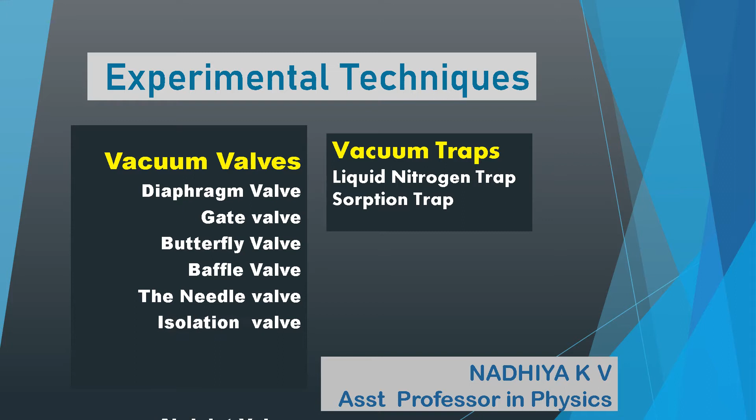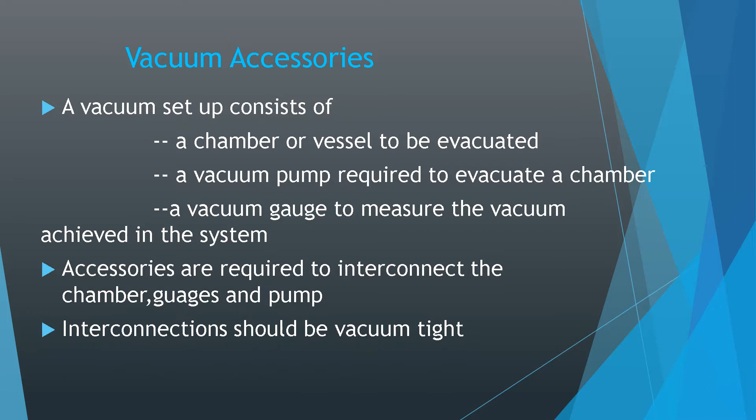Today we can discuss the topic which is the last topic of this module, that is vacuum accessories. A vacuum setup consists of a chamber or vessel to be evacuated, a vacuum pump required to evacuate the chamber, a vacuum gauge to measure the vacuum achieved in the system, and vacuum accessories required to interconnect the chamber, gauges and the pump, and the interconnection should be vacuum tight.

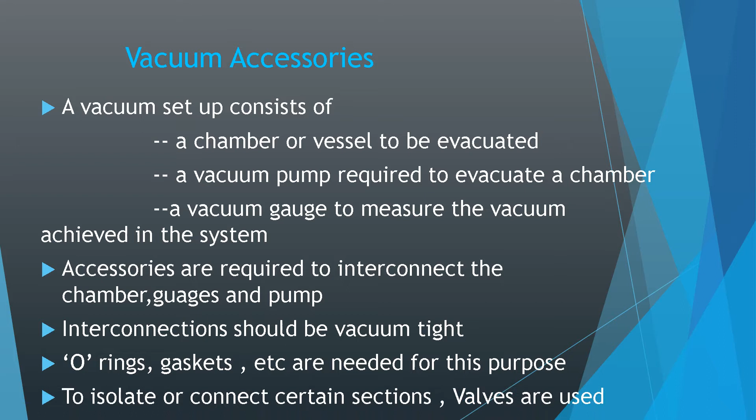O-rings, gaskets, etc. are needed for this purpose. To isolate or to connect certain sections, valves are used, that is vacuum valves. We had to discuss the following valves together today.

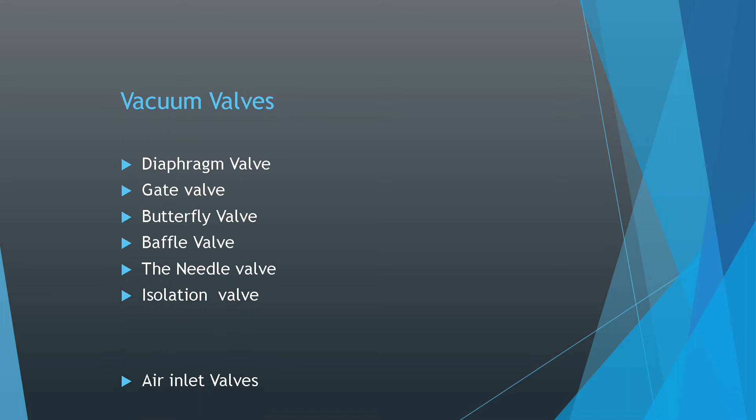The first one we are going to discuss is the diaphragm valve. It is the simplest and frequently used valve. A diaphragm is made of a polymer material and is clamped at its edge, and the stem is attached to the center. The diaphragm, when pushed against the valve body B below, isolates the input and output ports.

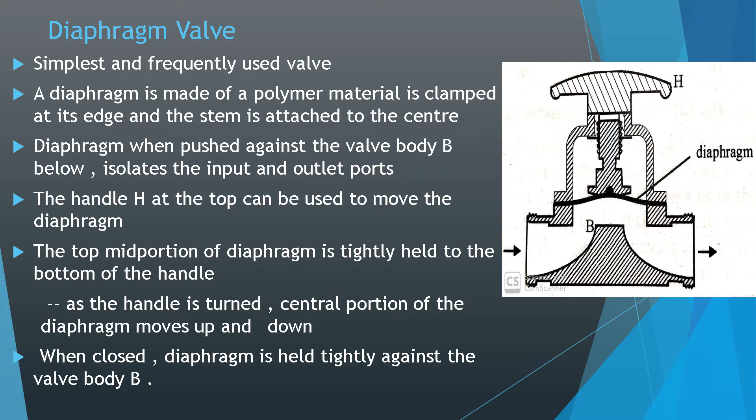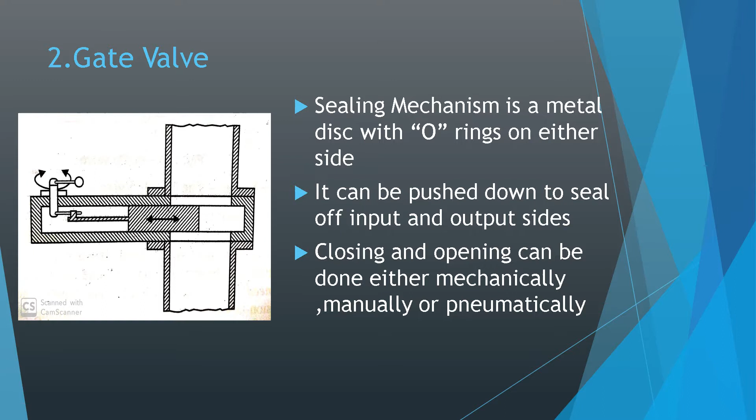Next is the gate valve. The sealing mechanism is a metal disc with O-rings on either side. It can be pushed down to seal off input and output sides. Closing and opening can be done either mechanically, manually, or pneumatically.

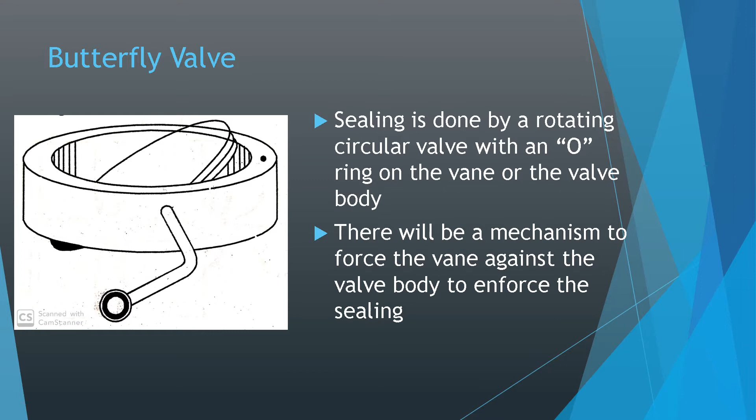Next one is the butterfly valve. This is the figure to represent the butterfly valve. Sealing is done by rotating the circular valve with an O-ring on the vane or the valve body. There will be a mechanism to force the vane against the valve body to enforce the sealing.

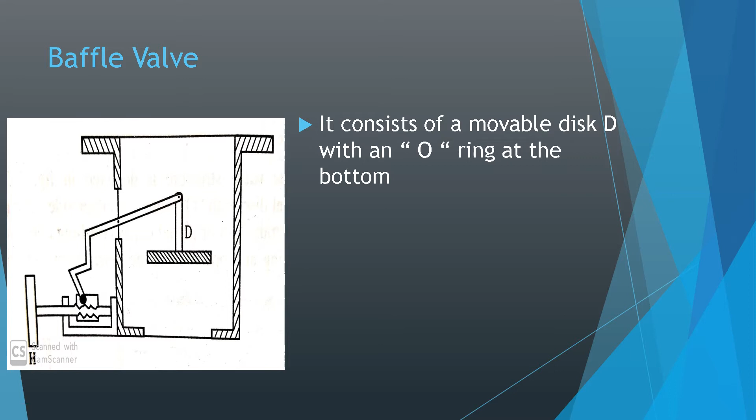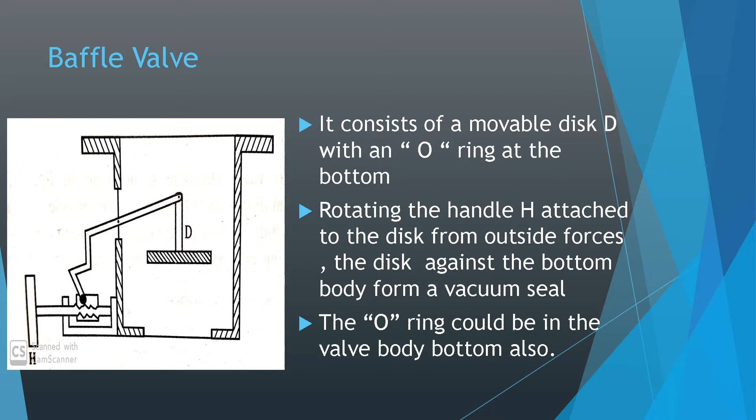Next is the baffle valve. It consists of a movable disc D with an O-ring at the bottom. Rotating the handle H connected to the disc from outside forces the disc against the bottom body to form a vacuum seal. H is given in the lower side of the figure, that is the handle, and D is the movable disc in which an O-ring is connected at the bottom. The O-ring could also be in the valve body bottom. That is, one O-ring at the bottom of disc D, and the valve body bottom consists of another O-ring.

Next one is the adjustable valve or needle valve. A vacuum chamber may require containing small quantities of gas at low pressure, which is needed to create an inert atmosphere. Sometimes it requires a continuous or controlled flow of gas. In such cases, the gas will have to be continuously admitted into the system from one side while it is pumped from the other side. The solution for the above two cases is the needle valve.

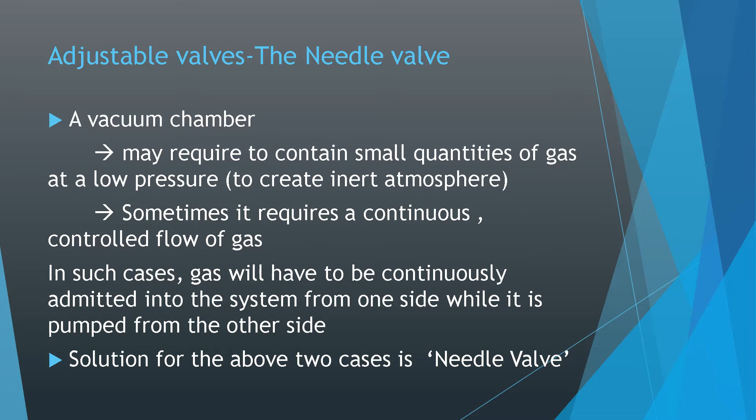Here a figure to represent the adjustable needle valve is given. It consists of a precision tapered needle structure N moving in and out inside a housing. N is used to adjust the clearance between the needle and the valve body, thus allowing varying quantities of gas to flow from one side to the other.

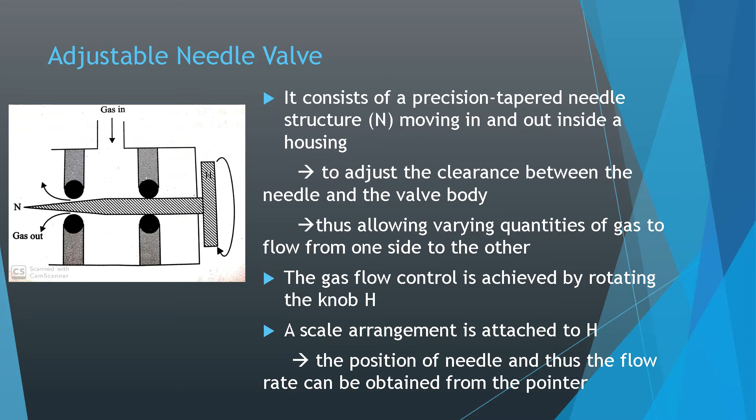The gas flow control is achieved by rotating the knob H. A scale arrangement is attached to H indicating the position of the needle, and thus the flow rate can be obtained from the pointer. The next one is isolation valves.

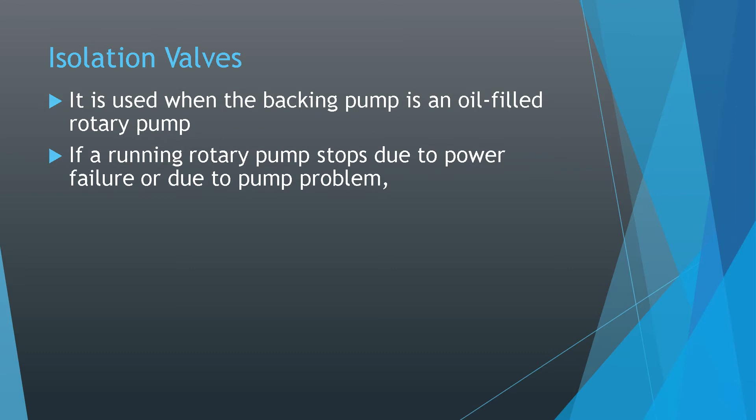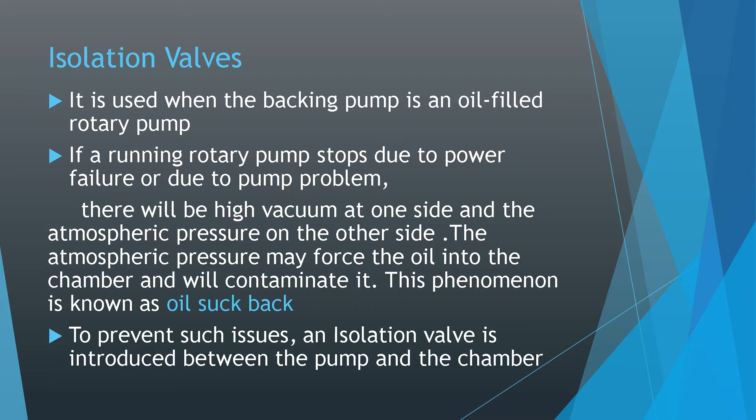This is used when the backing pump is an oil-filled rotary pump. If a running rotary pump stops due to power failure or pump problem, there will be high vacuum on one side and atmospheric pressure on the other side. The atmospheric pressure may force the oil into the chamber and contaminate it. This phenomenon is known as oil suck back. To prevent such issues like oil suck back, an isolation valve is introduced between the pump and the chamber.

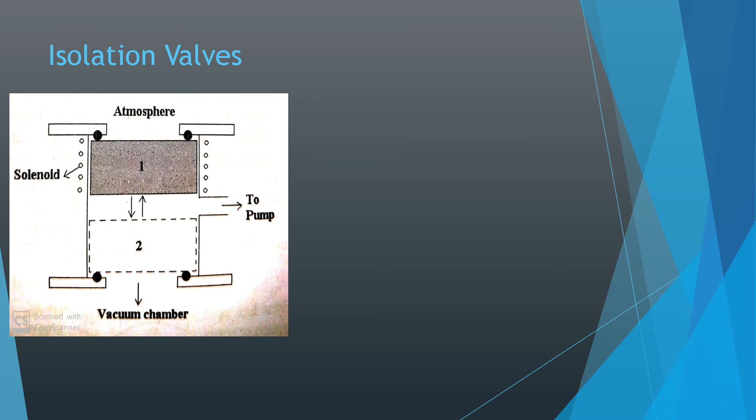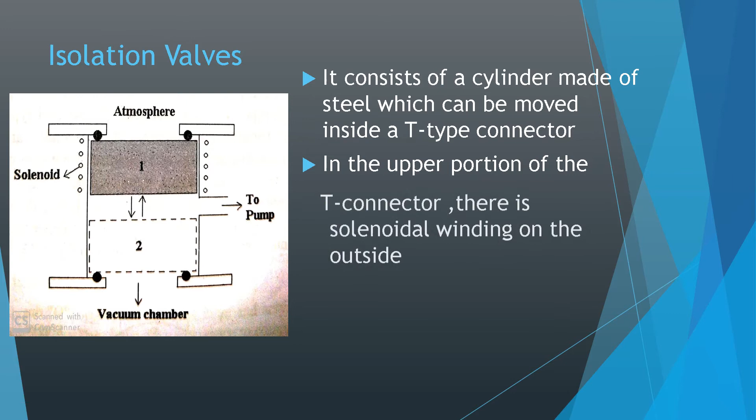This is the figure to represent the isolation valve. It consists of a cylinder made of steel which can be moved inside a T-type connector. In the upper portion of the T-connector, there is a solenoidal winding on the outside. The solenoid is powered from the same power supply as the rotary pump.

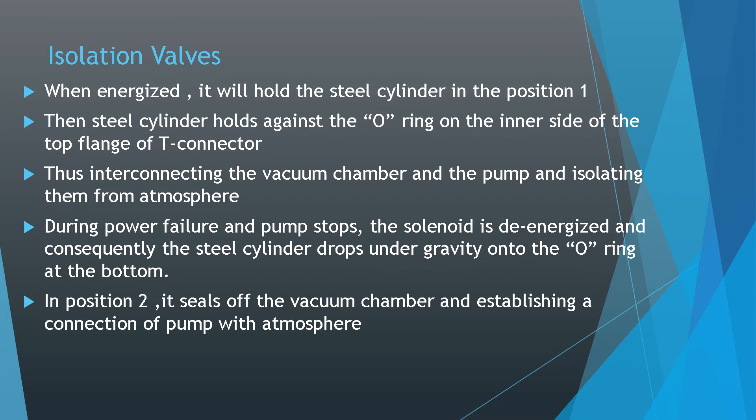Next is air inlet valves. The purpose of using an air inlet valve is to open a vacuum chamber for changing something inside. For example, in an accelerator laboratory, one may have to change the target inside the target chamber. In such conditions, the chamber is isolated from the vacuum pump by a suitable gate valve, and the air

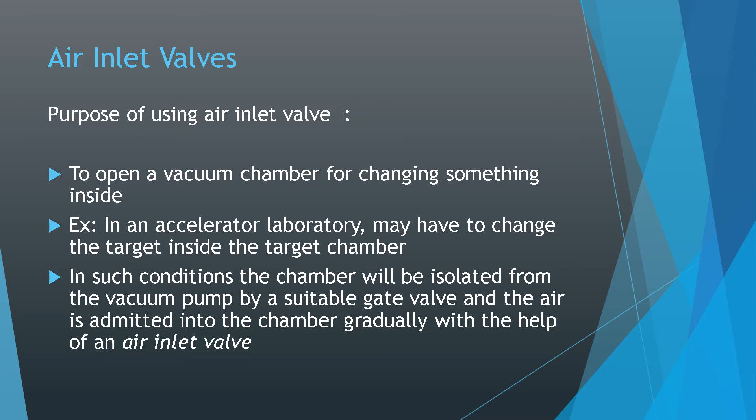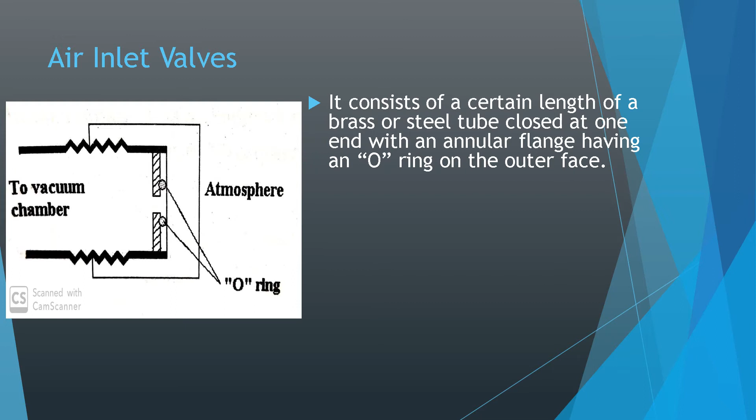is admitted into the chamber gradually with the help of an air inlet valve. This figure represents the air inlet valve. Two O-rings are connected. It consists of a certain length of brass or steel tube closed at one end with an annular flange having an O-ring on the outer face. The open end of the valve may be coupled to the vacuum chamber by direct welding or by another type of vacuum coupling. The screw cap can be opened when it is required to let air into the chamber.

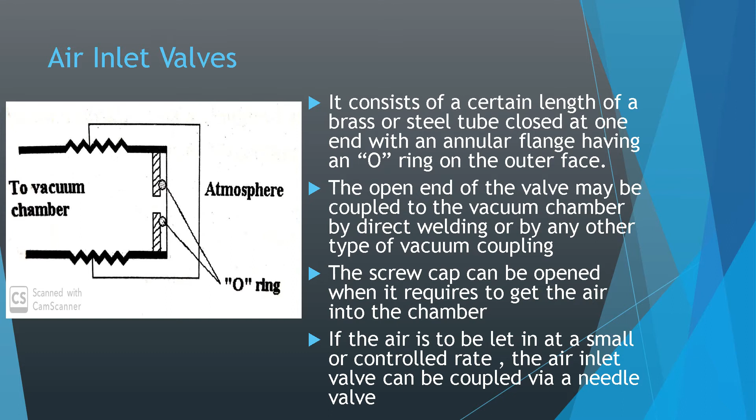If the air is to be let in at a small or controlled rate, the air inlet valve can be coupled via a needle valve. Next is flanges. These are used to interconnect vacuum pipes, connectors, etc. They are made of steel or brass, and there is an O-ring groove.

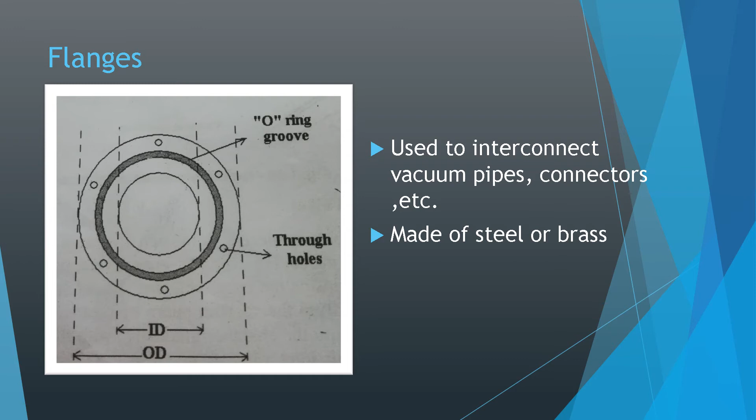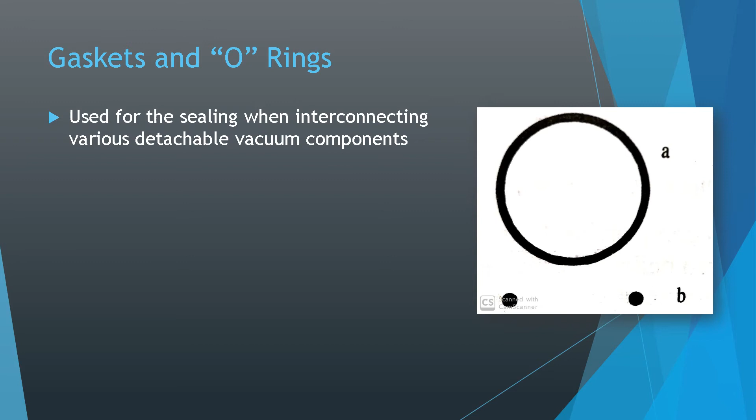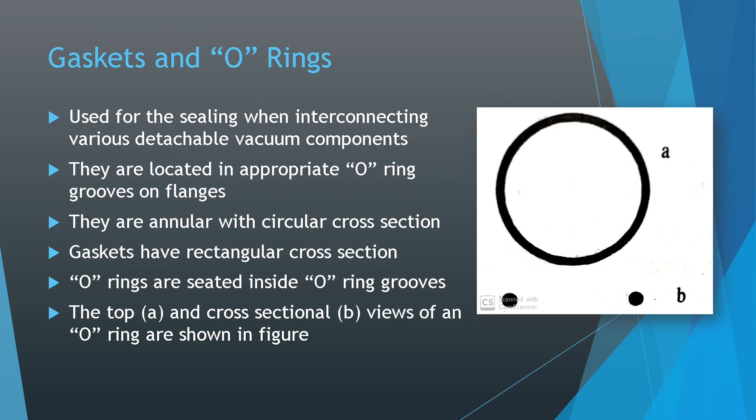Gaskets and O-rings are used for sealing when interconnecting various detachable vacuum components. They are located in appropriate O-ring grooves on flanges. O-rings are annular with circular cross-section, while gaskets have a rectangular cross-section. O-rings are seated inside the O-ring grooves shown in the flanges. In the figure, A represents the top view and B represents the cross-sectional view of an O-ring.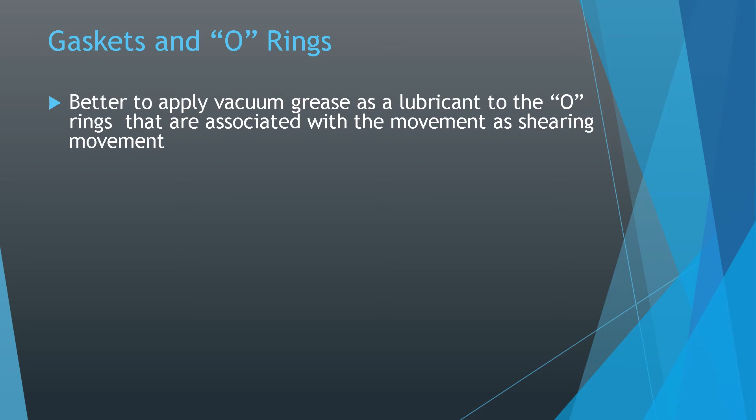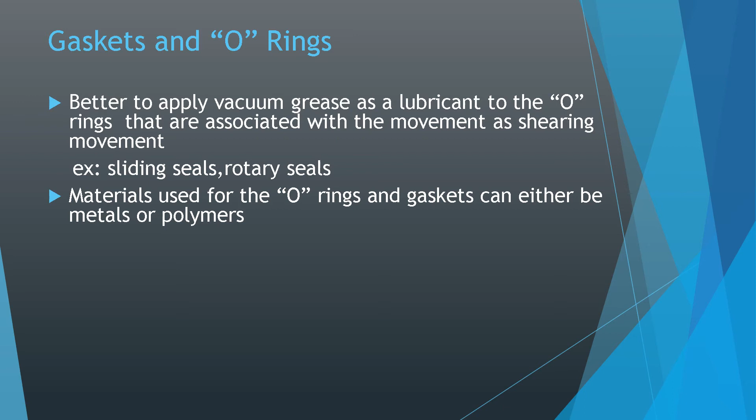It is better to apply vacuum grease as a lubricant to O-rings associated with shearing movement, for example sliding seals and rotary seals. The materials used for O-rings and gaskets can either be metals or polymers. Because of their special properties, polymers are also called elastomers, as they are rubber-like substances, incompressible, and deform when pressure is applied. When the pressure is removed, they regain their original shape and dimensions.

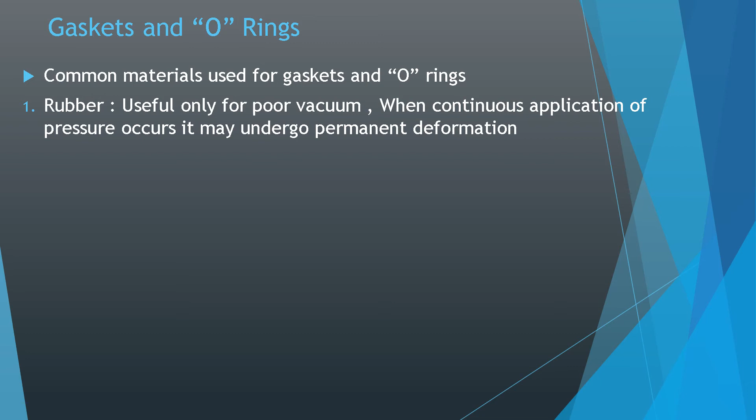There are six common materials used for gaskets and O-rings. The first is rubber, which is useful only for poor vacuum; under continuous pressure it may undergo permanent deformation. Next is nitrile, a copolymer of butadiene and acrylonitrile, which is mechanically very strong with high resistance to compressive set and can be used up to 80 degrees Celsius. The third is silicone, which has high chemical stability but is mechanically weak.

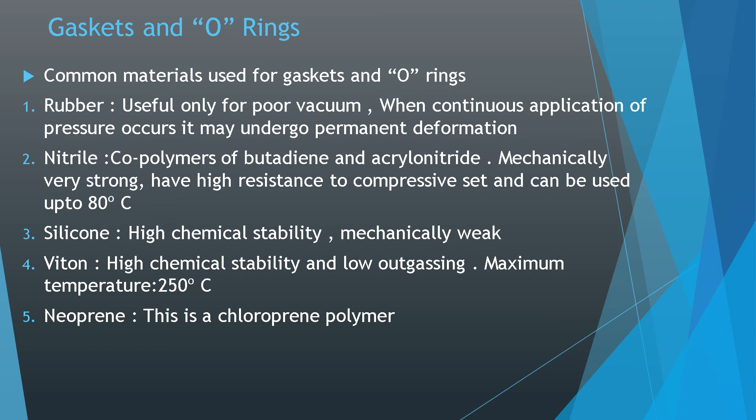The fourth is Viton, which has high chemical stability and low outgassing, with a maximum temperature of 250 degrees Celsius. The fifth is neoprene, a chloroprene polymer. The last type is metals, such as copper, aluminum, indium, and sometimes gold. Metal gaskets are also used in wire form, and these are used for ultra high vacuum applications.

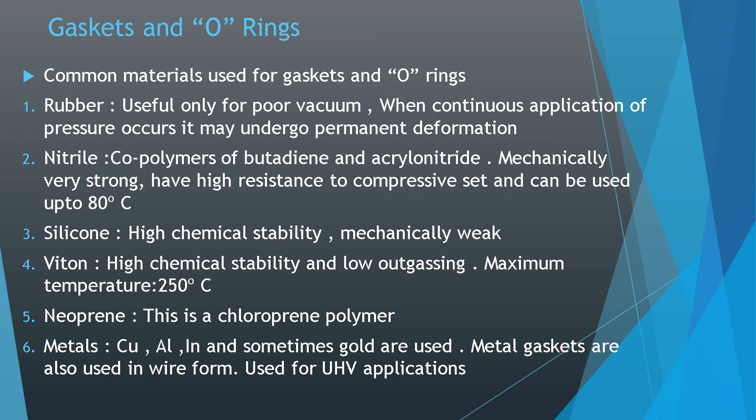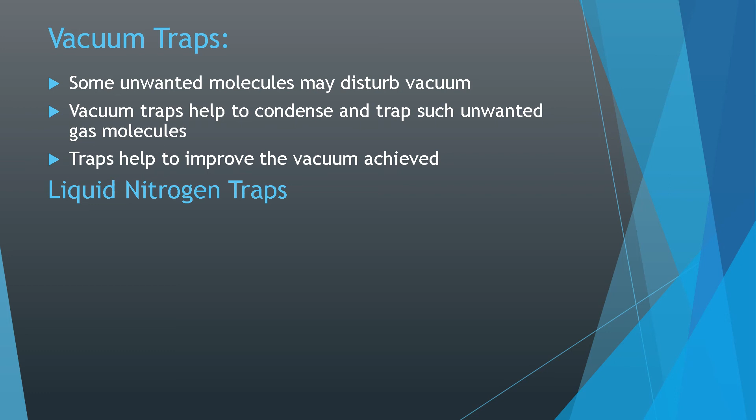Next, vacuum traps. Some unwanted molecules may disturb the vacuum. Vacuum traps help to condense and trap such unwanted gas molecules, improving the vacuum achieved. We will study the vacuum traps. One type is the liquid nitrogen trap, which is a standard accessory above mercury diffusion pumps and is used above oil diffusion pumps to achieve ultra high vacuum. Traps enable enhanced pumping speeds for condensable vapors. The pumped gas is allowed to pass through an enclosure cooled by liquid nitrogen.

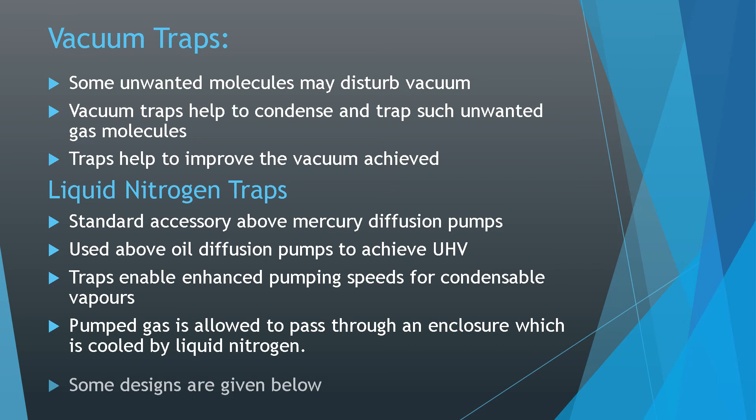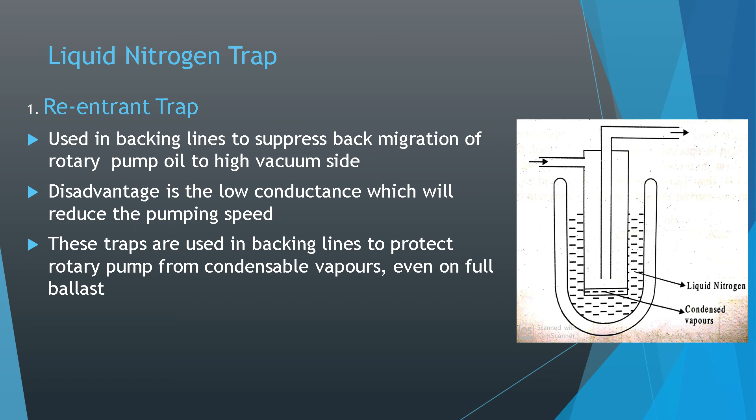Some designs are given. In the liquid nitrogen trap, there are two types. The first is the re-entrant trap, used in backing lines to suppress back migration of rotary pump oil to the high vacuum side. The disadvantage is low conductance, which reduces the pumping speed. These traps are used in backing lines to protect the rotary pump from condensable vapors even on full ballast. At a pressure below 1 torr, this trap protects the pump from hydrocarbon and water contamination.

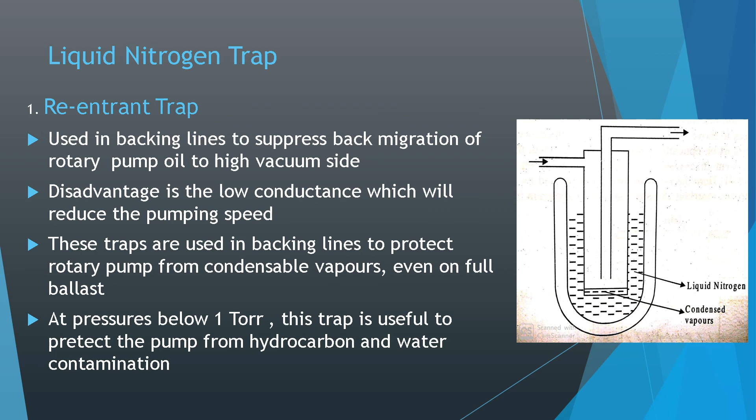In the figure, we have shown that the liquid nitrogen is placed near the condensed vapors. Next is the high conductance, high vacuum trap. It is thermally insulated by high vacuum. A molecule can travel from the pump connection to the system connection after making collisions with the cooled walls, where it is condensed and trapped.

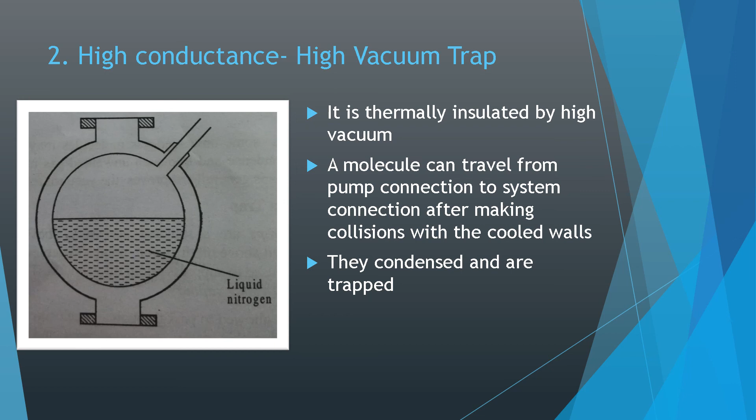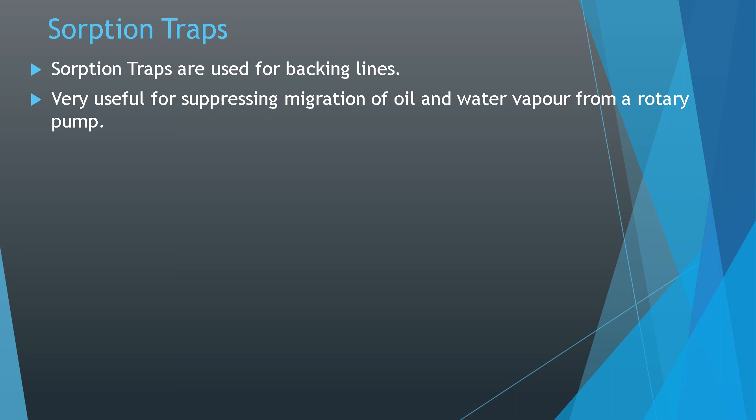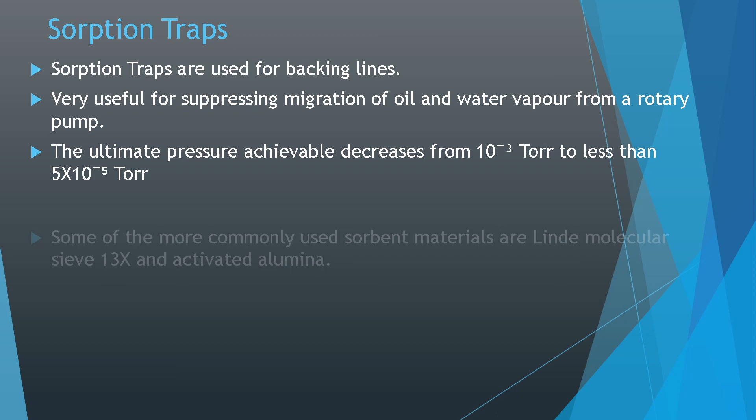Next is the sorption trap. These are used for backing lines and are very useful for suppressing migration of oil and water vapor from a rotary pump. The ultimate achievable pressure decreases from 10 to the minus 3 torr to less than 5 into 10 to the minus 5 torr. Some commonly used sorbent materials are Linde molecular sieve 13X and activated alumina, commonly used for protecting the vacuum chamber from rotary pump oil contamination.

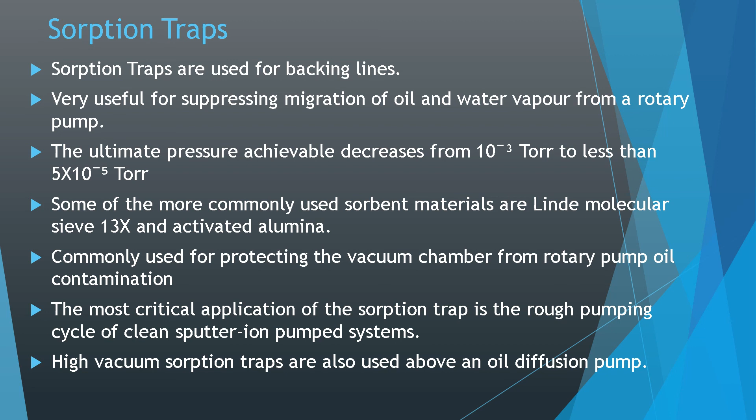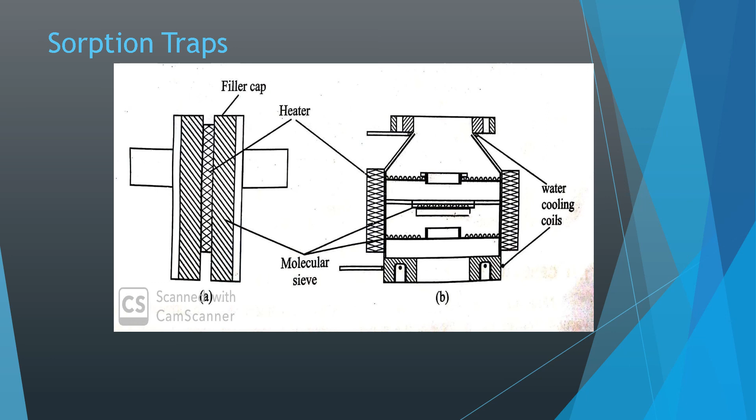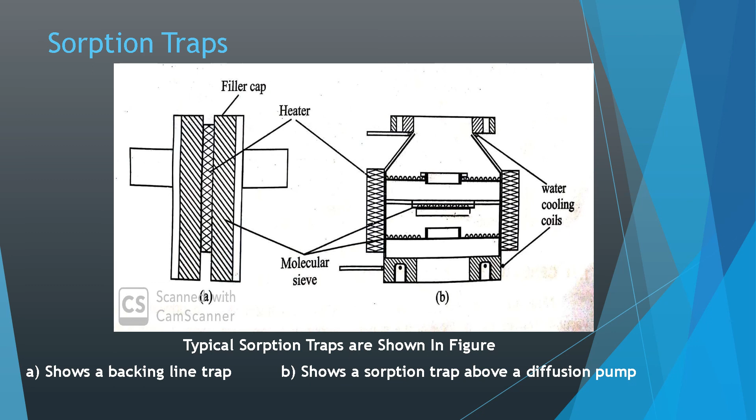The most critical application of this sorption trap is the rough pumping cycle of clean sputter-ion pumped systems. High vacuum sorption traps are used above an oil diffusion pump. The figure represents two portions of a sorption trap: the first shows the backing line trap, and the second shows a sorption trap above a diffusion pump.

Today we have discussed the topic of vacuum accessories, in which we went through vacuum valves in detail—there are many different types of valves—and also vacuum traps, O-rings, and gaskets. Thank you.